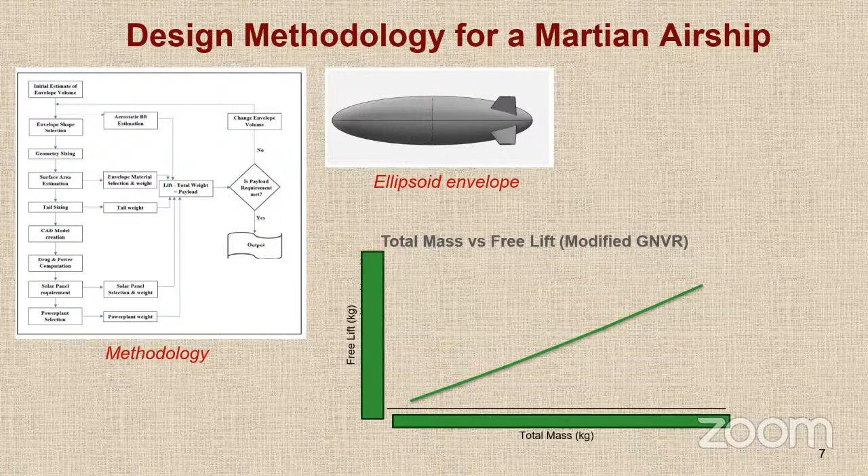So here, for example, we found that if you look at the total free lift on an airship, as the mass increases, the free lift increases almost linearly. This is what we found. So the methodology you develop is helpful in obtaining such trends to know where things can go wrong, because there is an upper limit on the total mass. Immediately you come to know what the limit is. These kinds of graphs have to be obtained when you use the methodology.

Similarly, we also came across in literature a methodology for designing a fixed wing UAV, where there are two kinds of balances. There is an energy balance where energy required is balanced with energy needed, and the mass to be lifted is balanced with the total mass of the system. On the right hand side top, you can see this taken directly from a paper. I don't want to go into details right now because I'm not suggesting you use this methodology only.

Once you use a methodology, for example, this particular work you are seeing is based on the PhD thesis of Dr. Noth from ETH Zurich. His thesis is easily available online. This is the design of a UAV for continuous flight, which is also what you want to do, but his work is mainly for Earth, and you'll have to adapt it for the Mars environment.

When you make a methodology, you can actually do a study of how the wingspan changes, how the total mass of the aircraft changes as the wingspan changes for various aspect ratio values, and similarly power at the propeller, speed, wing area, solar area ratio - how it changes with wingspan for various aspect ratios. These kinds of numbers can be generated by you if you have a proper methodology.

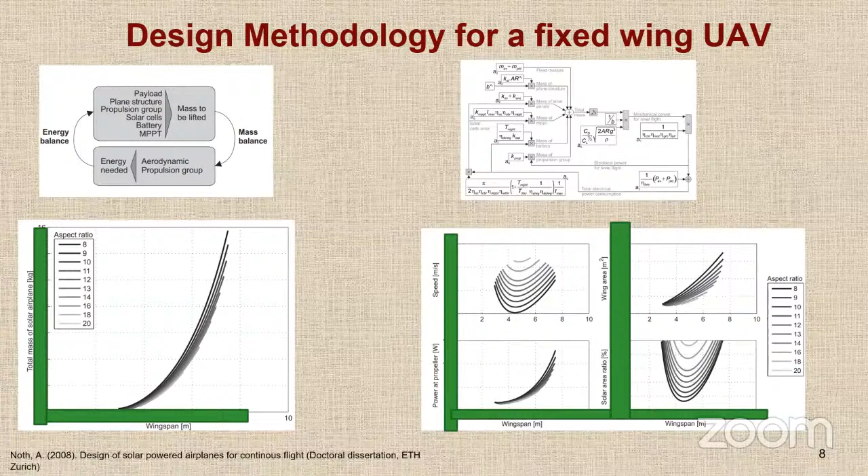Now, the design framework for this problem is very straightforward. You need an energy model, and you need a mass model. These are coupled together through aerodynamics and propulsion models, so all of them have to work together. As I said, there will be an energy balance - energy required should be balanced with energy available, and mass of the system should balance with the mass that can be carried. With that, you will get the final design.

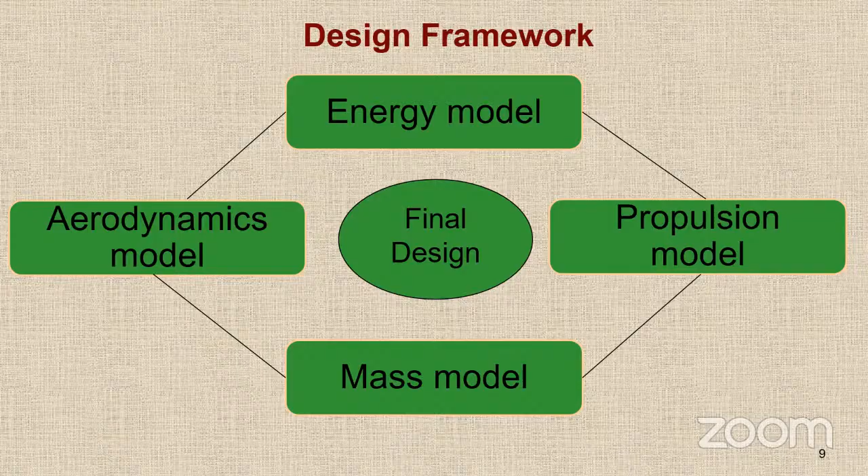Similarly, if you are going to look at multi-rotor UAVs, we have done some studies on various types - coaxial helicopter, single disc helicopter, all kinds of configurations. We studied that if the payload is 0.93 kg, what is the mass? If there is 2 kg, what is the mass? Similarly, breakdown of the various items should also be investigated.

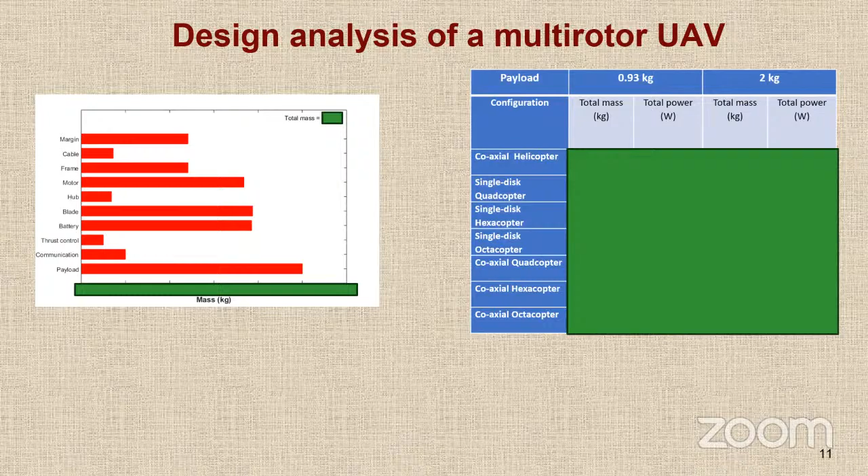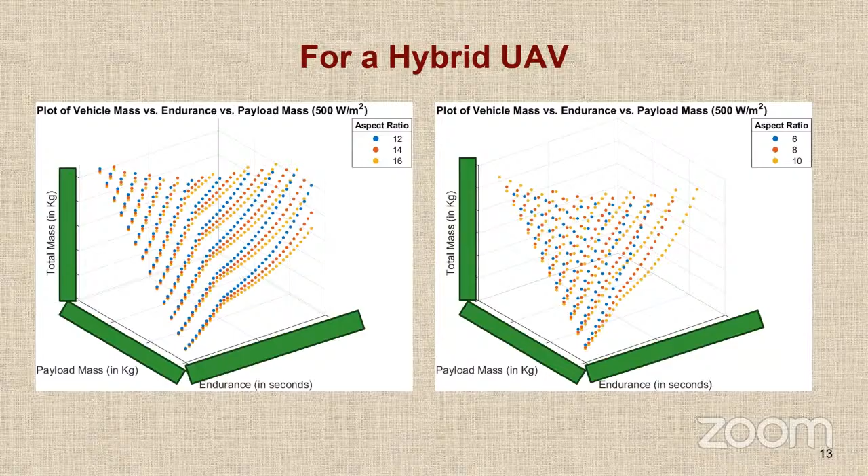If you look at three things here - the endurance, the payload mass, and the total mass - how do they vary with each other at different aspect ratios for an assumed value of solar irradiance, which can then be modified to bring in the actual solar irradiance. Similarly, vehicle mass versus endurance versus payload. These kind of studies have to be done.

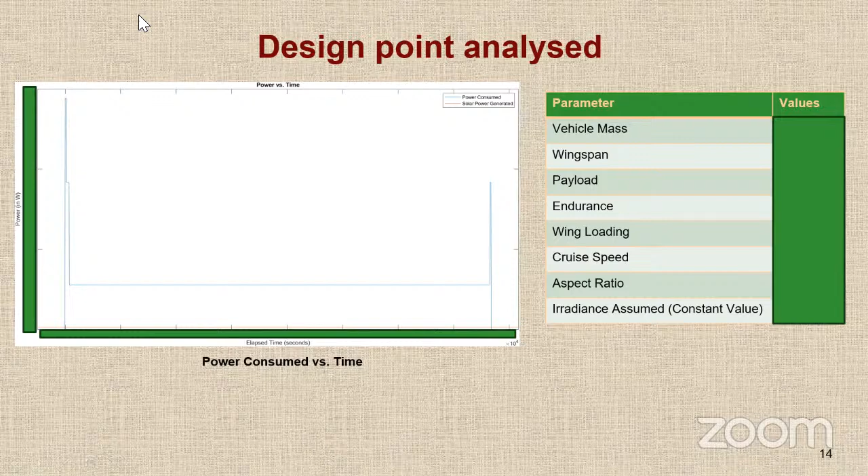The other thing you have to study is stowage, because this whole system has to be folded and carried in an aeroshell. So it's important to study in literature what kind of systems have been used, right from the very small Ingenuity, total mass 1.8 kg, up to a large one.

I'm repeating what we showed you last time. We are suggesting some softwares that we would recommend, but we are not saying that you should use only this - we are only suggesting. Some of these softwares are commercial, so you will need licenses to use them. Software like LaTeX is open source. OpenFOAM, OpenVSP - these are all open source softwares.

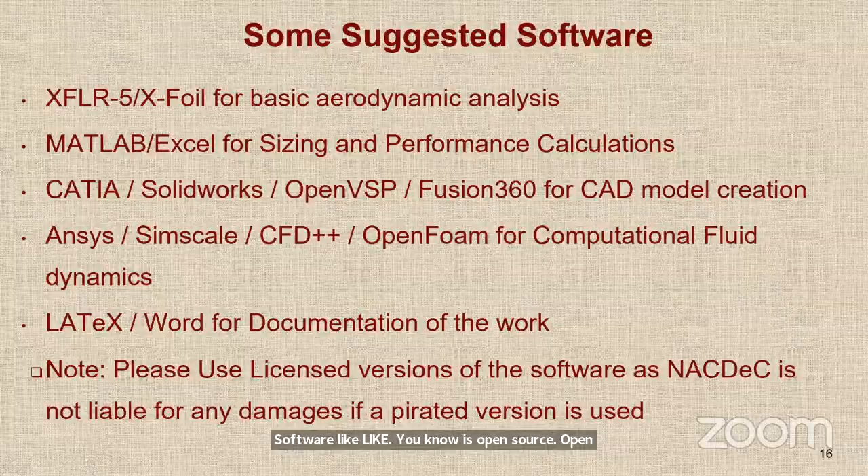Okay, that's all. We want to open it for queries. In fact, we want to have a bigger discussion rather than my presentation. So I'm going to stop my sharing.

Good morning, sir, this is Rajat from One Team Mangal. Just one minute. Yeah, correct. Yes, we can start our discussion now. Yeah sir, so very good morning sir, thanks for your inputs and your guidelines.

So coming to the design framework, could you please refresh this diagram, the energy model and the aerodynamic model, and what are the other models that we need to basically develop, that we need to integrate into this system? You don't have to go by what we have done.

We have just shown you that you have to investigate various types of configurations. We don't want to bias you by saying use these systems only. You determine, as a team, which configurations are suitable. Don't go by the configuration that we have studied.